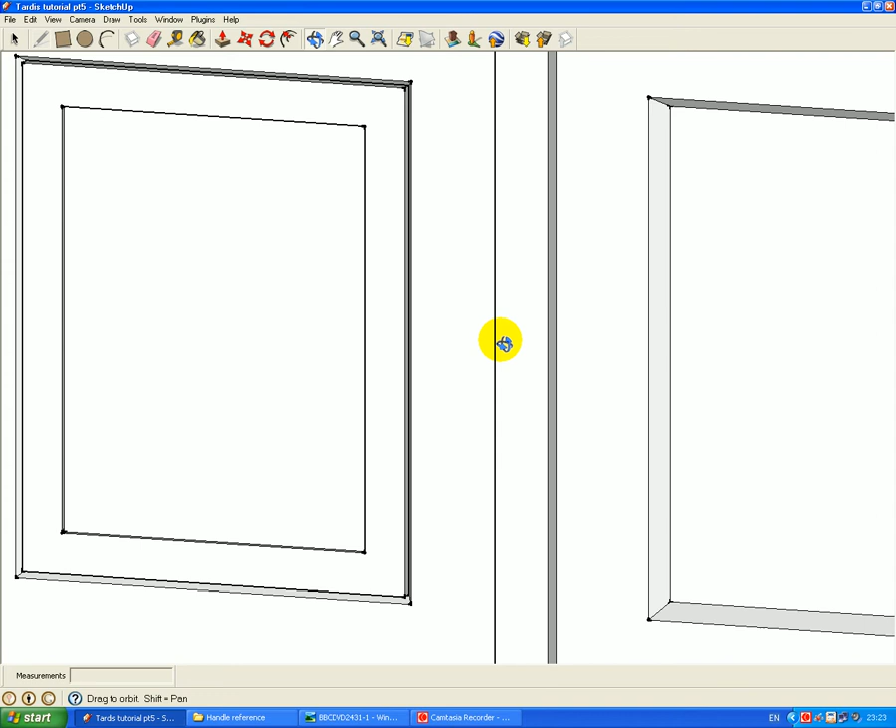I've started by loading the model from part 5 and zooming in on the centre part of the doors, and we're going to start by creating a couple of guides. First guide is from this edge here to the centre of this panel, which is 35 millimeters. Another guide from this top edge down the same face to the centre line of the panel, which is going to be 190.

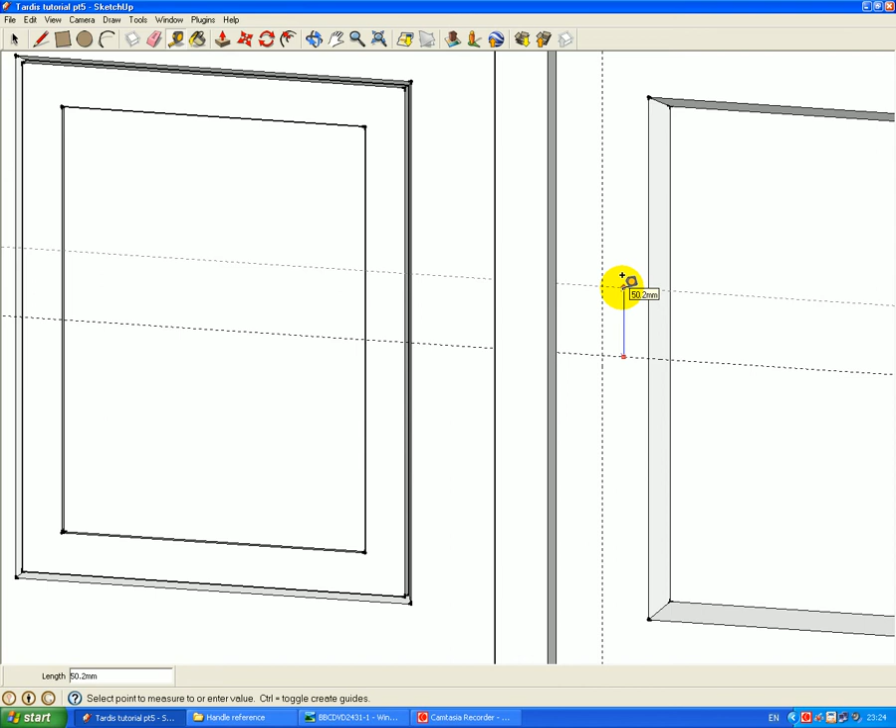We then need to create another guide up from this centre line, and that's going to be 82.5 millimeters. We'll also need a centre line on this panel, which is going to be at 15.

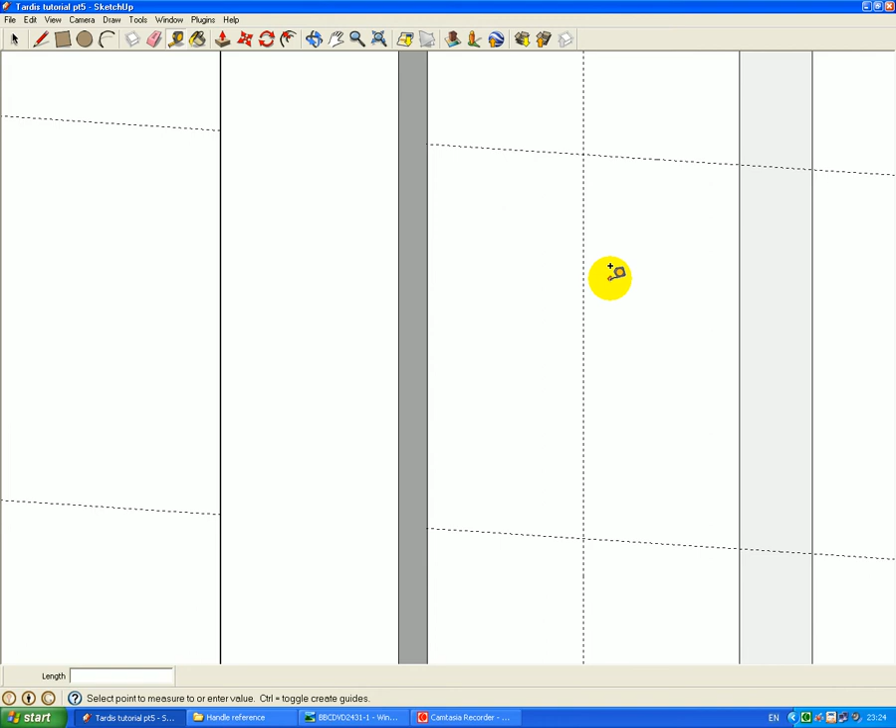We'll zoom in on this main work area here, where we're going to start to make the handle. First of all, we're going to start with the circle tool, and on the intersection of these two guides we're going to draw a circle that is 7.5 radius.

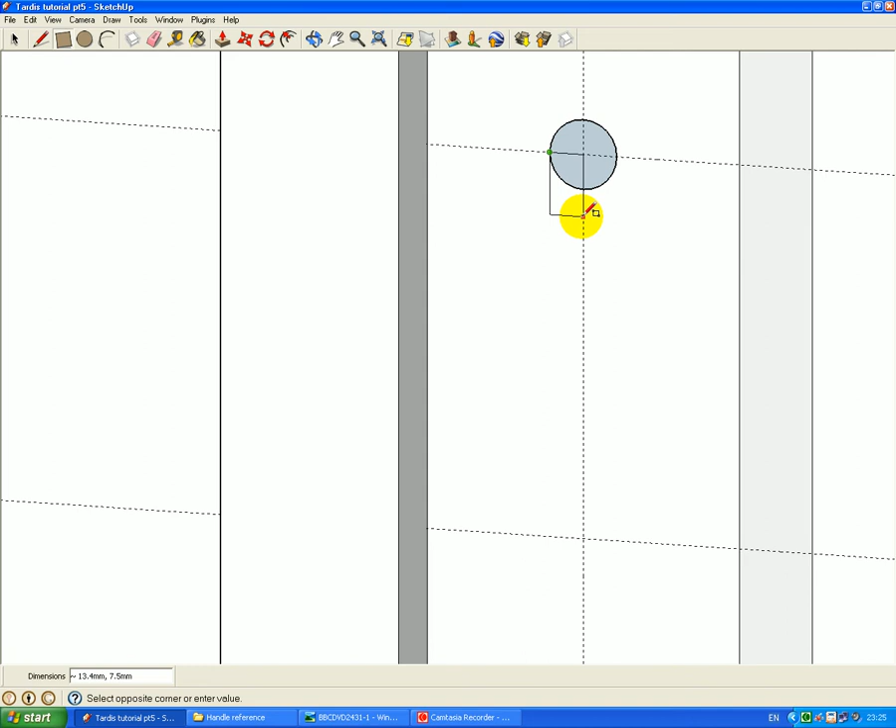We are then going to create a rectangle from this edge on the centre line, and it's going to be 32.5 by 15. We need to remove some unwanted lines from this, this circle here and this line here. Don't worry about that guide being deleted, we probably aren't going to need it again.

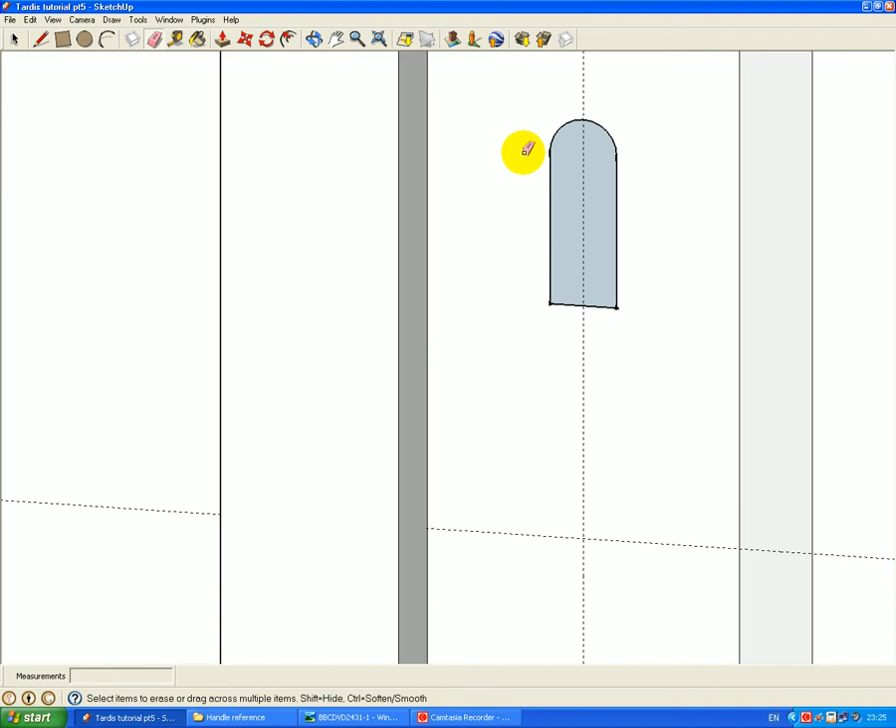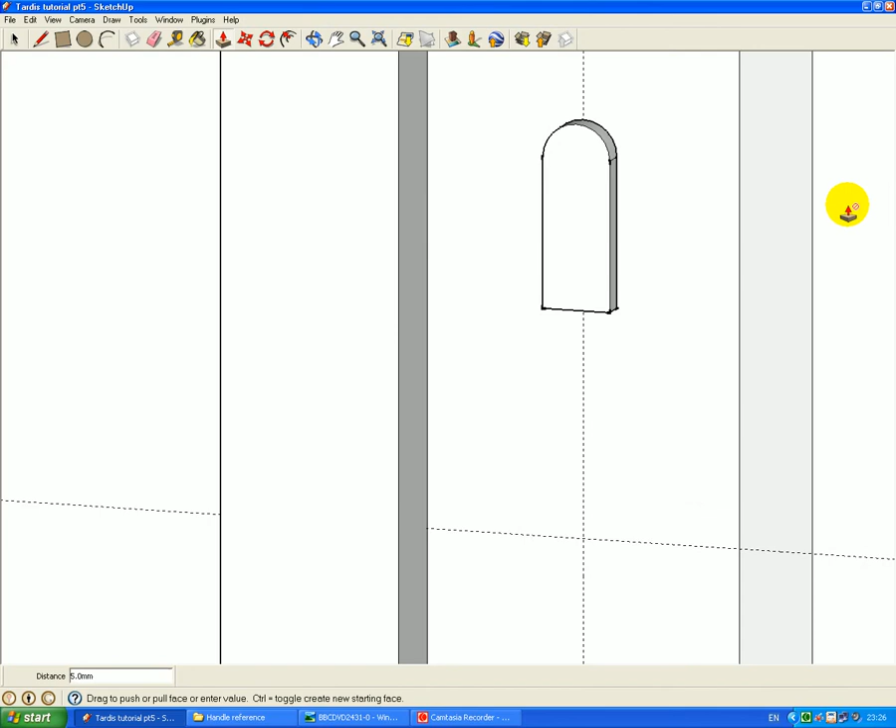Okay, we're going to zoom in a bit closer now. We're going to make our first screw hole. So again, the circle tool, but first of all, made a mistake there. We need to create a centerline guide on this surface, so from there, 7.5.

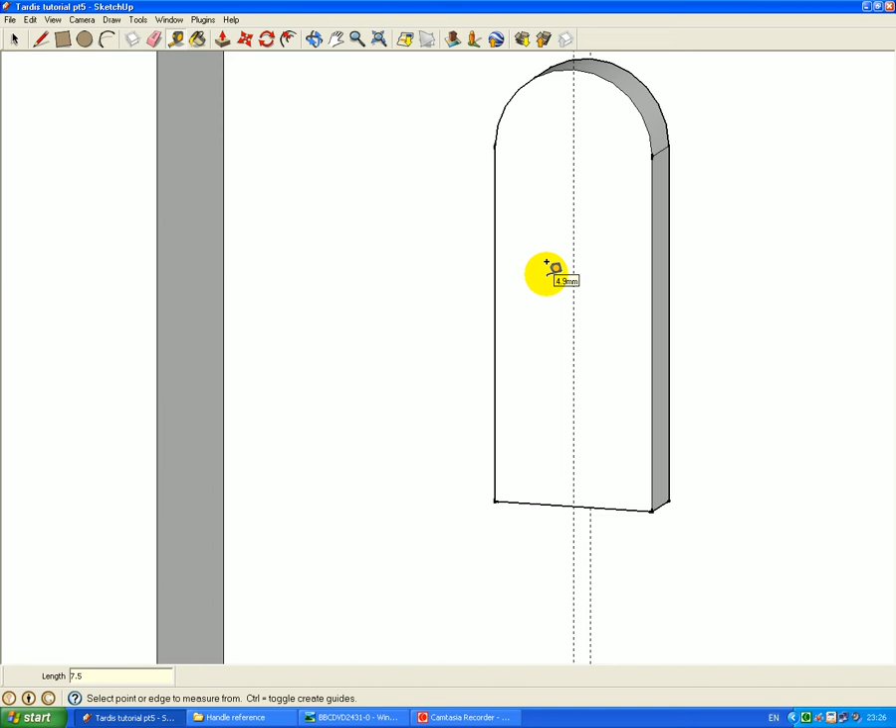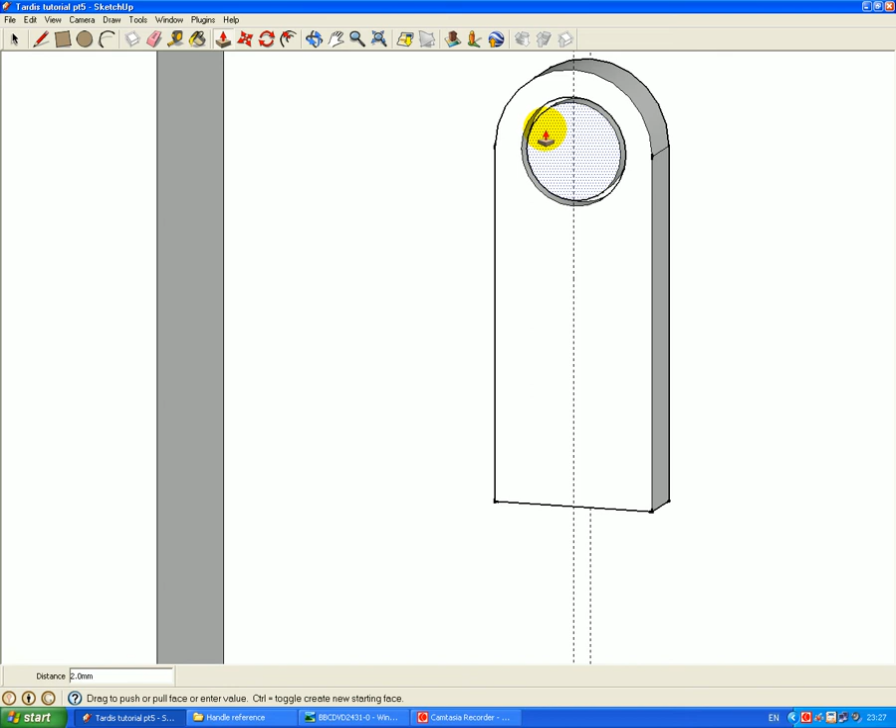Now we go back to the circle tool. Reference this edge here, and then go to the center line and produce a circle which is going to be 5 radius. Then use a push-pull tool to push that in by 2 millimeters, and then use the offset tool to offset this bottom circle by 0.5 millimeter, and then use the push-pull tool to pull that back out again by 2 millimeters. This is going to be our screw hole and screw head.

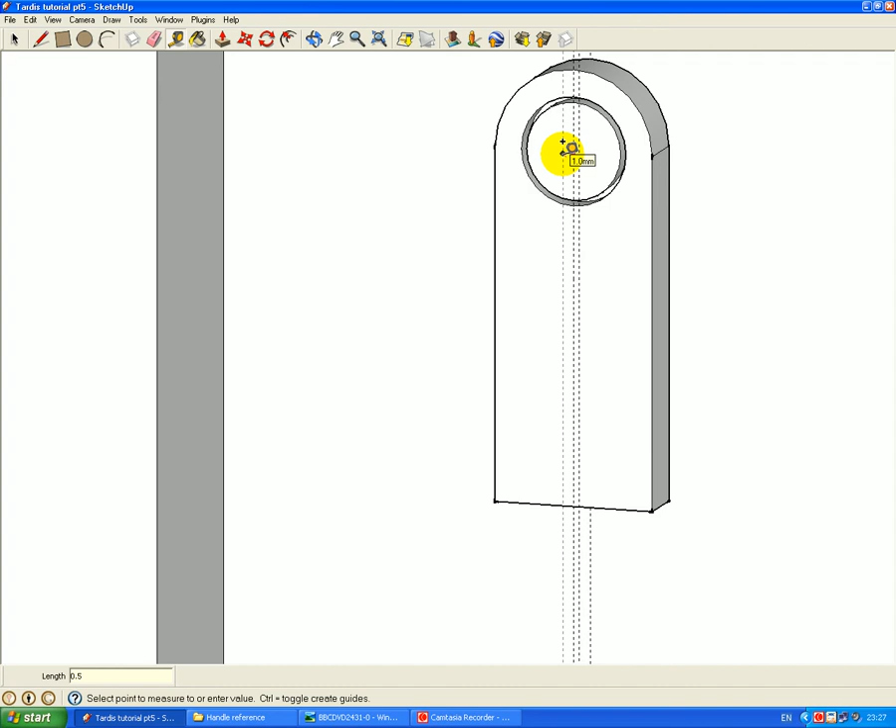We need to add another couple of guides. So from this centre line, we want a guide that's 0.5 millimeter over, and the same the other way, 0.5. If we zoom in on this circle, this screw head, and pan down a bit, we're going to use the line tool now to mark out the slot where the screwdriver would have tightened up the screws.

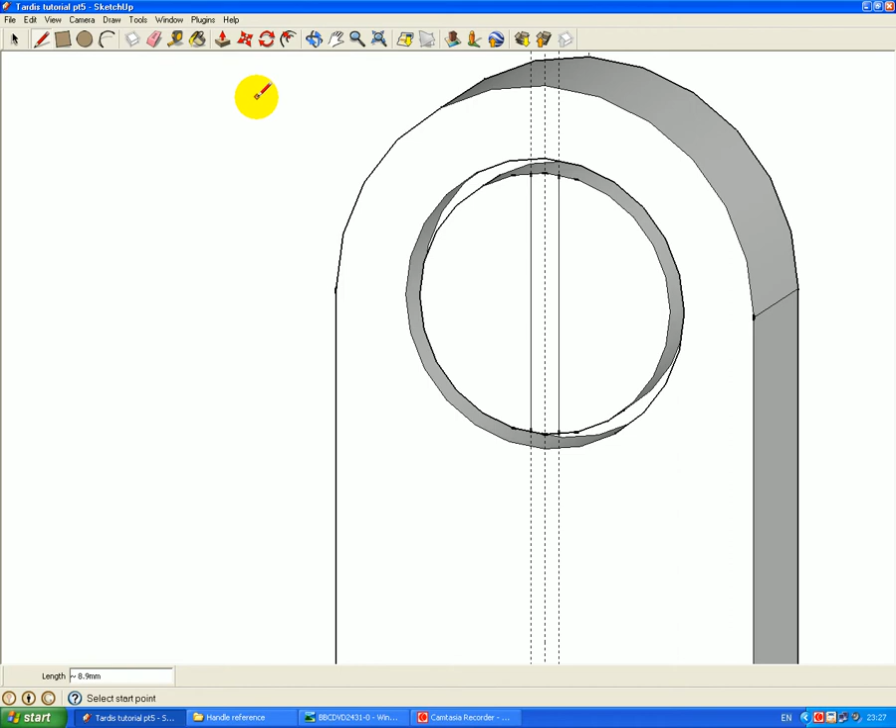So a line down there, and a line down there. Now if you use a push-pull tool, push that surface in by 1mm. And we now have a screw hole with a screw head.

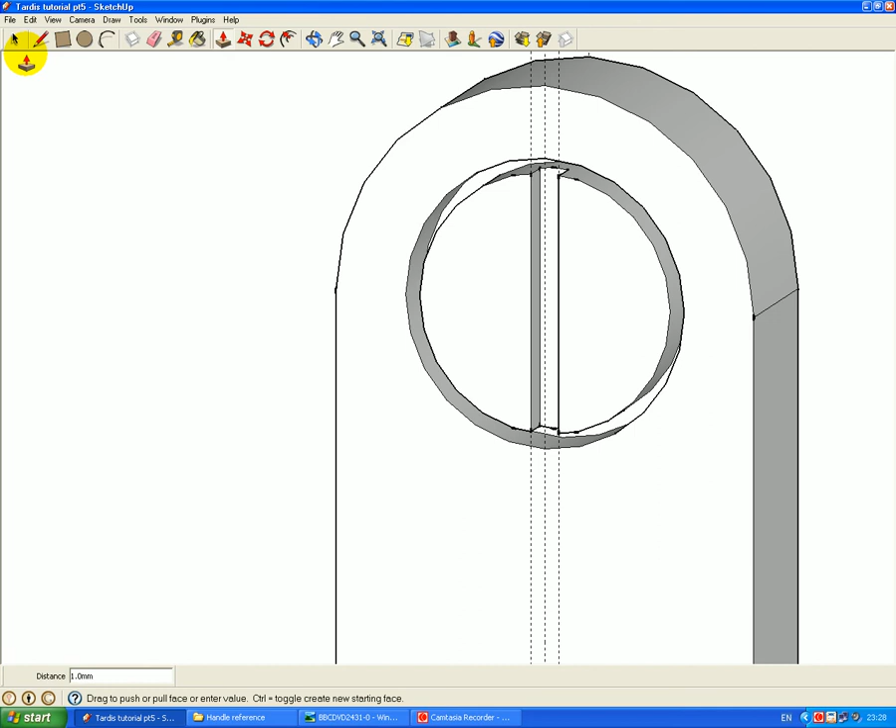To make it more natural looking, we're going to rotate the screw around to some sort of random angle. First of all we need to select it all, and we need to make sure that all the surfaces are selected. As you can see, this one isn't dotted, and neither is that one. Let's just check to make sure all the others are done.

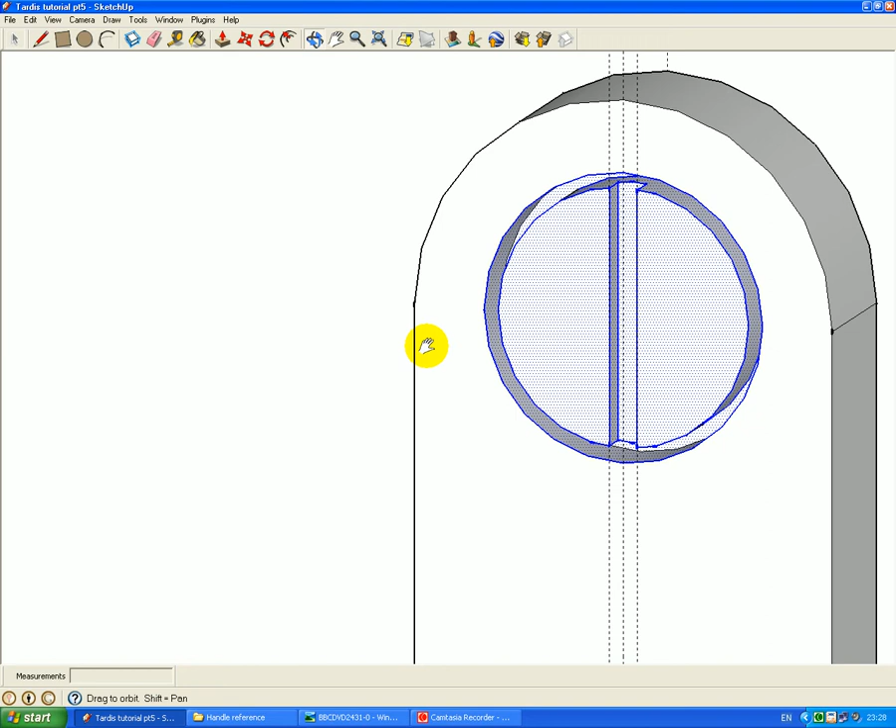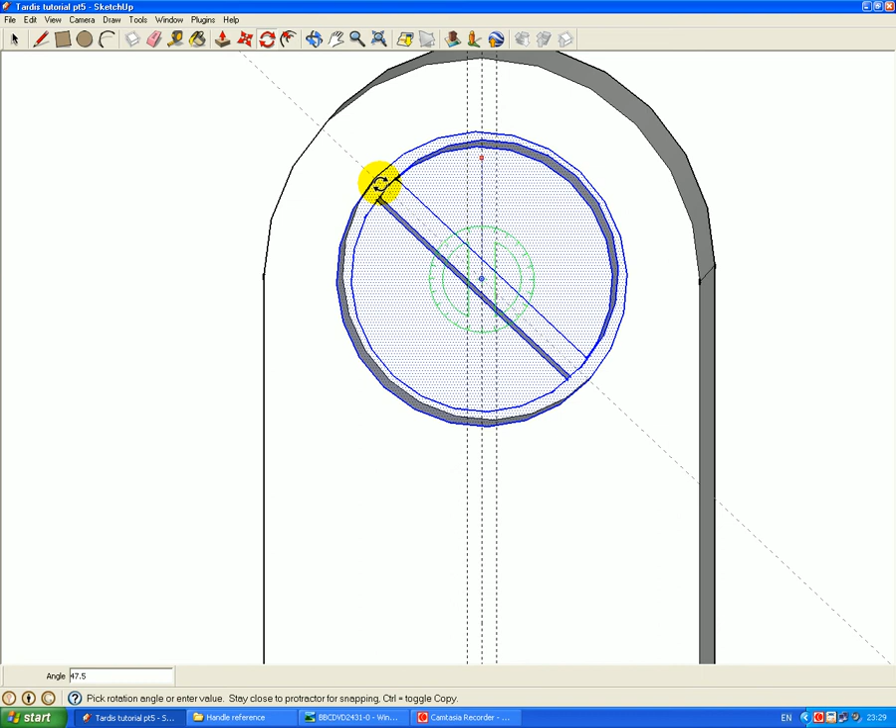So we'll tilt it around. There we go, yeah, they're all selected. Now with the rotation tool, again reference this edge here across to the middle, then up the centre line, and then just rotate it round at a random angle. There we go, that's the first screw done.

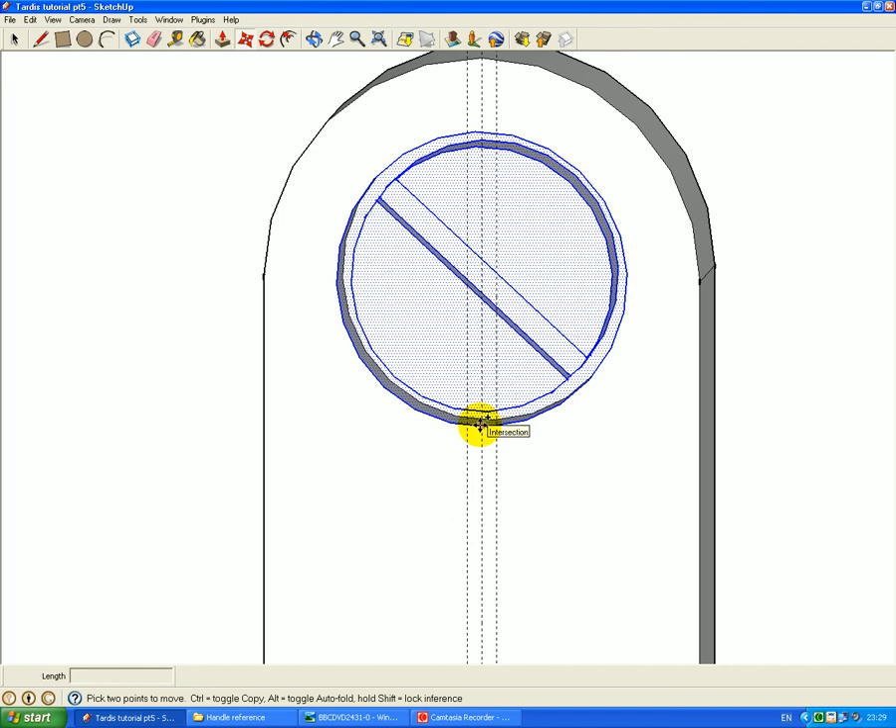We now need to make a copy of this and drag it down to make the second screw. So we go to the move tool, hold the control key down in the centre line here to start to drag it down and make a copy, and we want to move it down by 15. Zoom out, and there's our two screws.

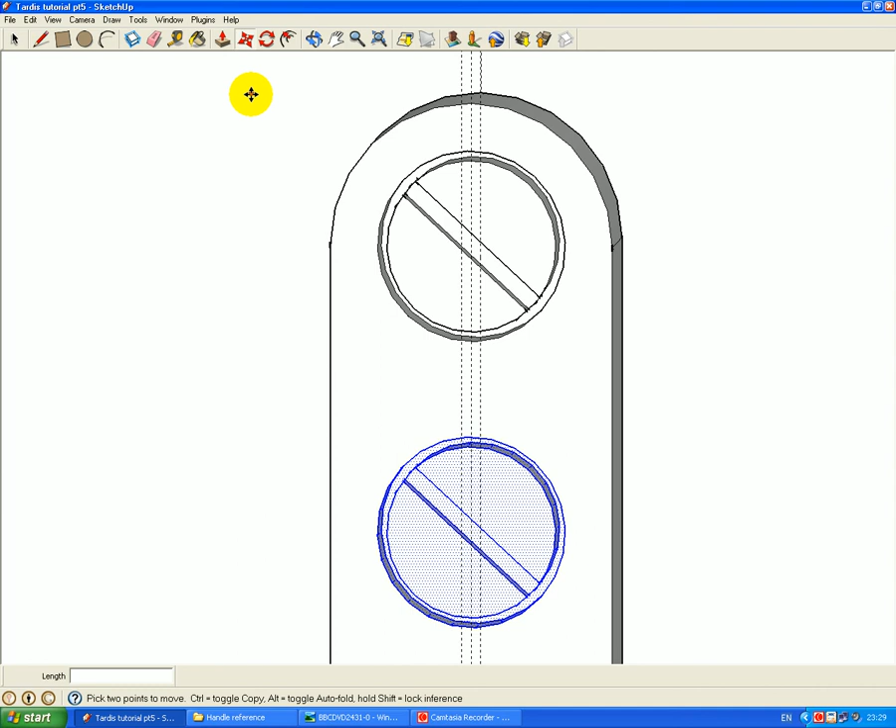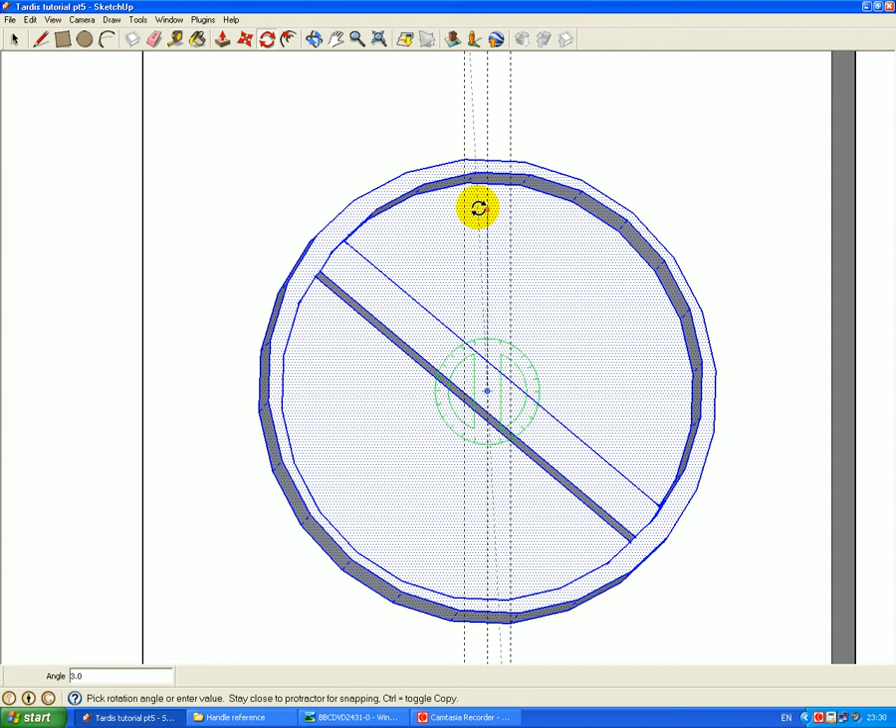I'm going to just rotate this one to a slightly different angle so it looks a bit more natural. Pan up and zoom in, and again we want the rotate tool, reference the edge here, and then go to the centre and up the centre line, and then just rotate it around to some other random angle. That's fine, there you go.

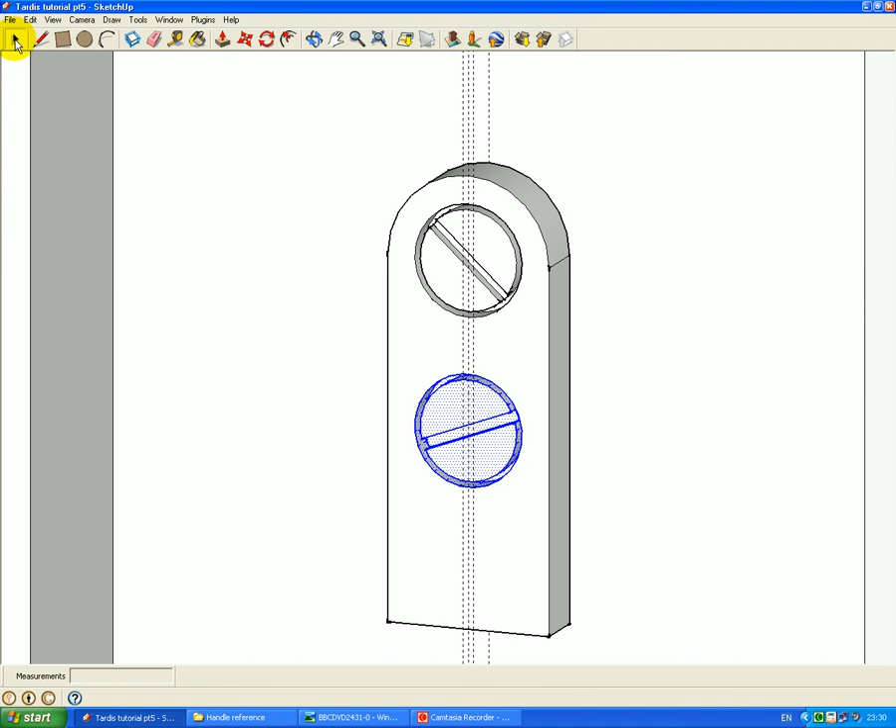Pan around, zoom out, and that's our first plate made with the screws in it. We're going to now make a copy of this, so we need to select it all.

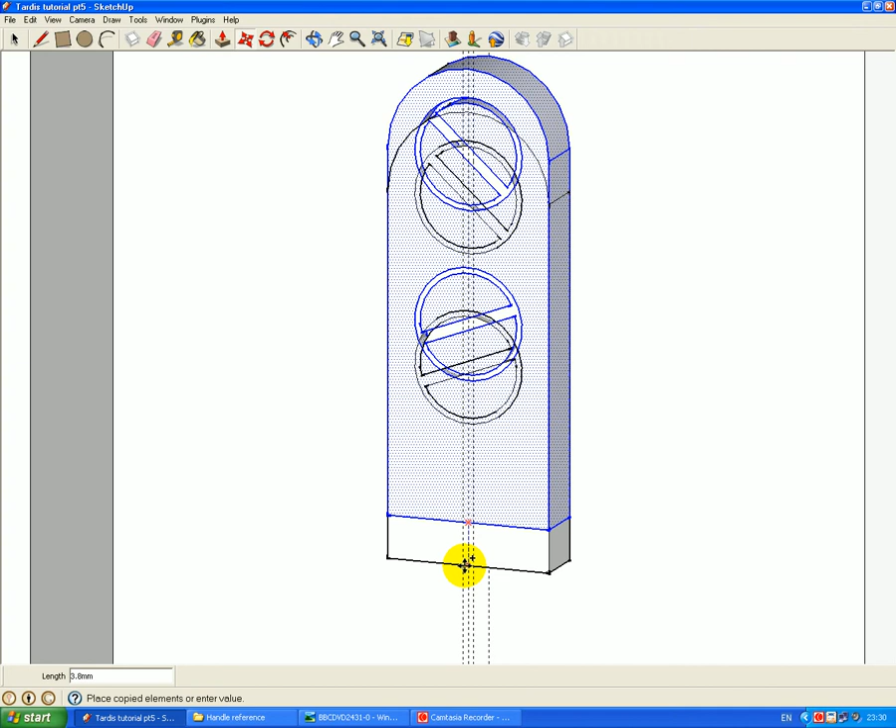Select the move tool. If we move it from this intersection between the centre line and the bottom edge, hold the control key down and drag, we'll make a copy of it, and we need to move it down by 100.

Let's pan up. There we go. Okay, that's in the right position, but it's facing the wrong way. We need to rotate it around by 180 degrees so it faces the opposite way round.

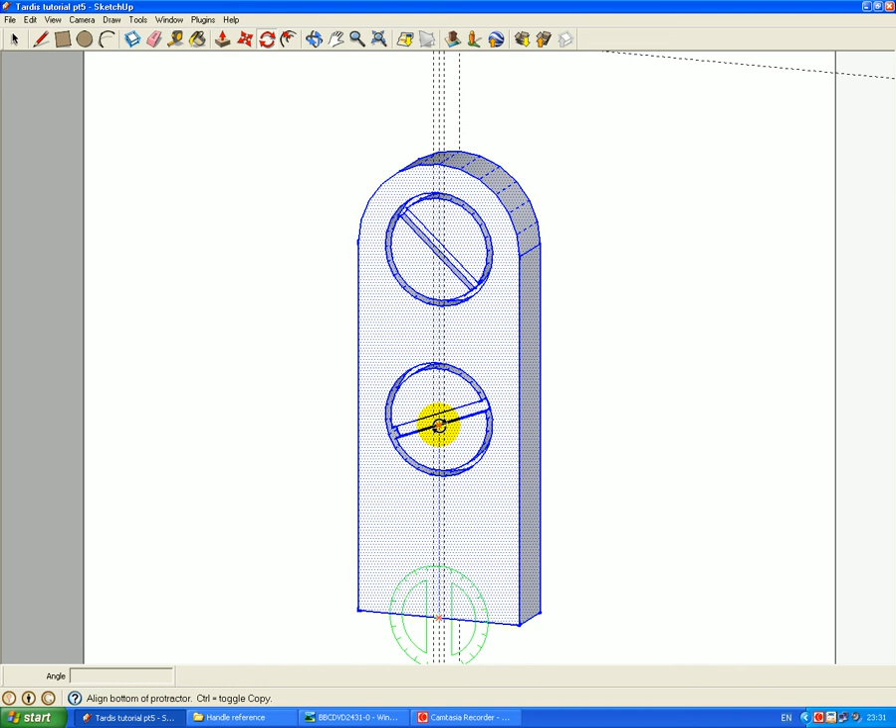So get the rotation tool, we'll align it with the intersection of the centre line and the bottom edge, go up the centre line, start to rotate it, and we want to rotate it round by 180 degrees. Okay, that's done. Zoom out.

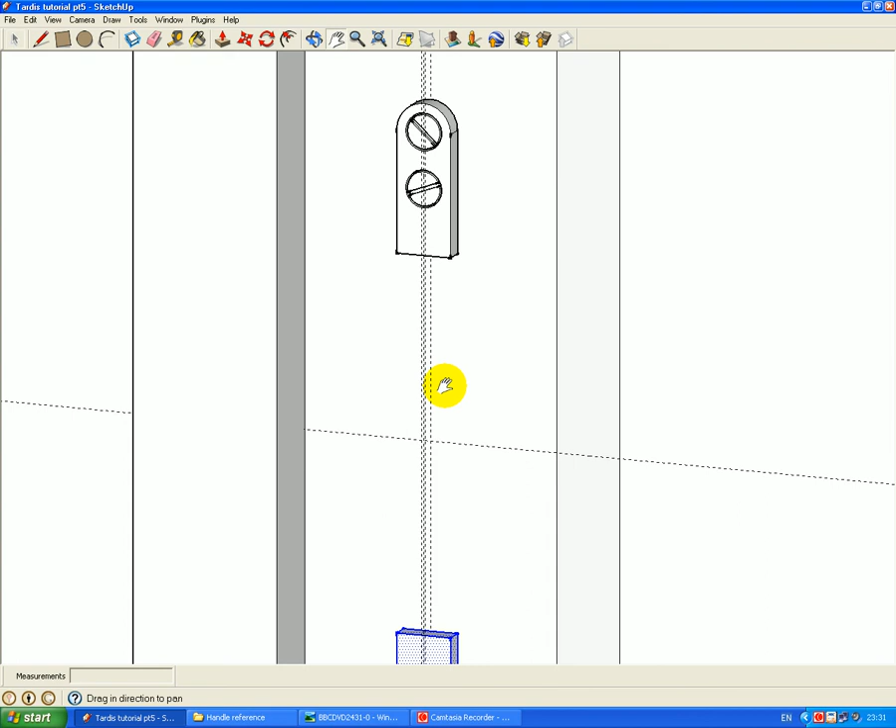And there we have our first two screw plates, which we're now going to form the handle on. So if we zoom in on the top plate.

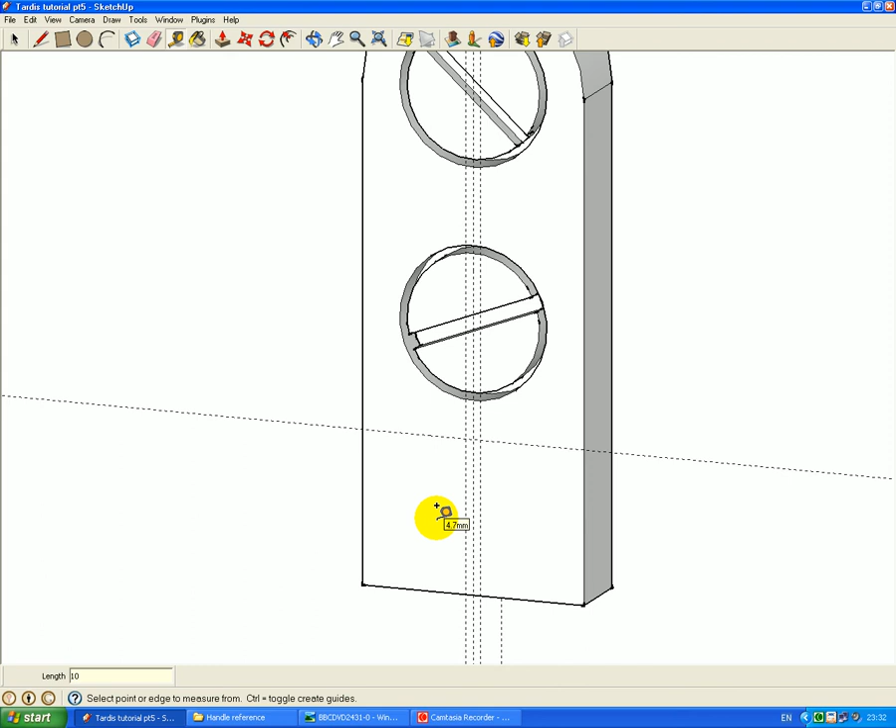We're going to make the cross section of the handle. First of all we're going to add another guide from this bottom edge, and that wants to be 10 from the bottom edge. Now we need to go to the arc tool and start on this corner here and this corner here, and then we'll produce a semicircle, so that will be 7.5.

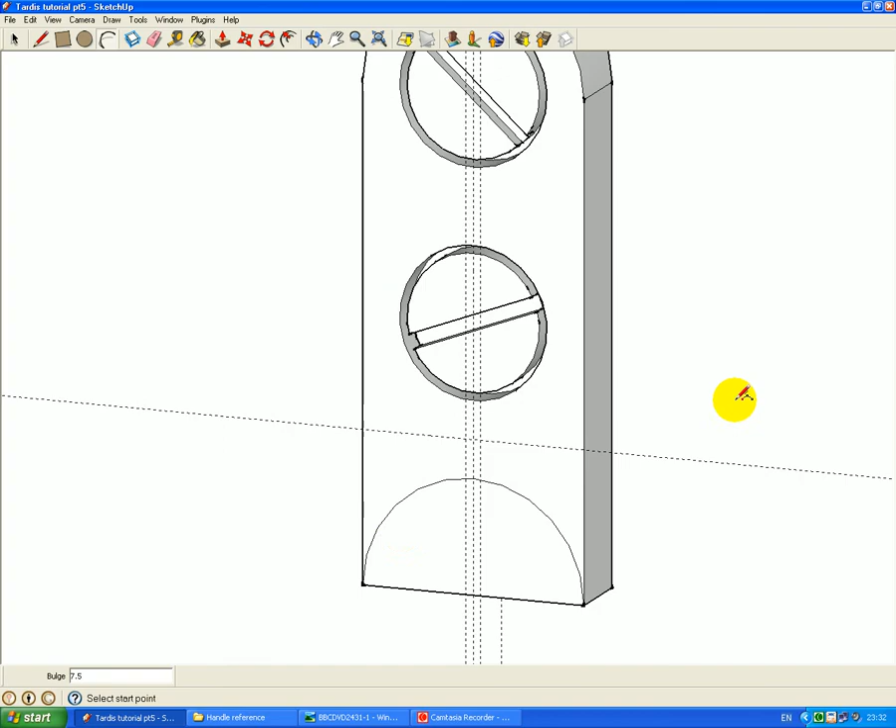If you look at the handle in the photo, it isn't sort of semicircular, it's more half elliptical, half an oval shape. So we're going to scale this handle, this semicircle, to make it into a sort of an oval type shape.

First of all we select it, then go to the scale tool, and then scale it from this edge upwards until it snaps to the 10mm line. That is our cross section of our handle.

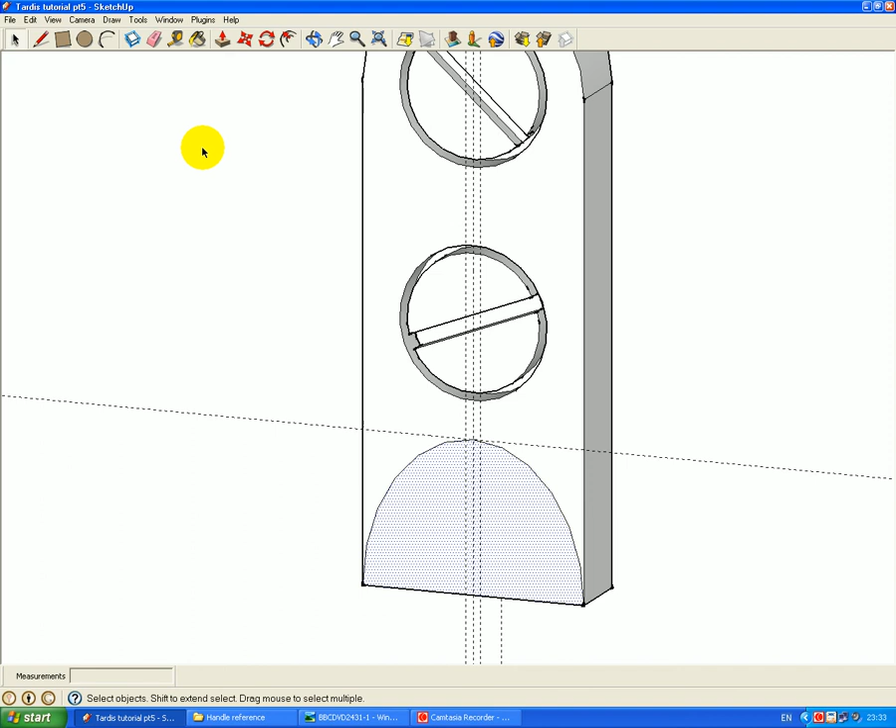We now need to make a guide for the handle to follow. First of all, we need to tilt it around a little bit more for this, and start off with the pen tool, and from this intersection here on the bottom edge in the center line, we need to draw a line on the green axis 15mm long.

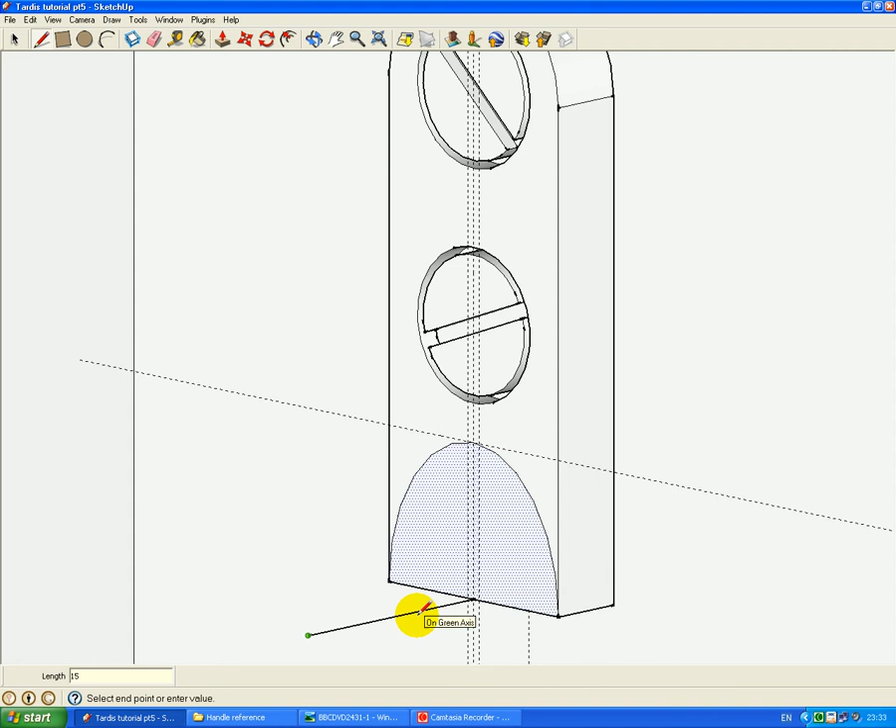We now need to create an arc on the end of this line, so go to our arc tool, let's go to the end of the line and start to create the arc along the blue axis, and that wants to be 40 diameter.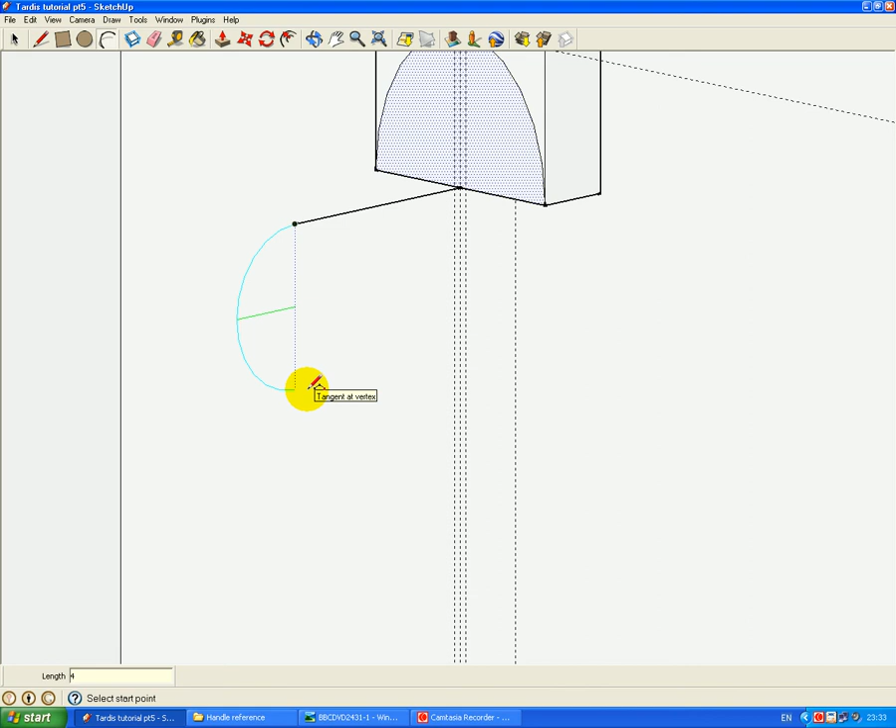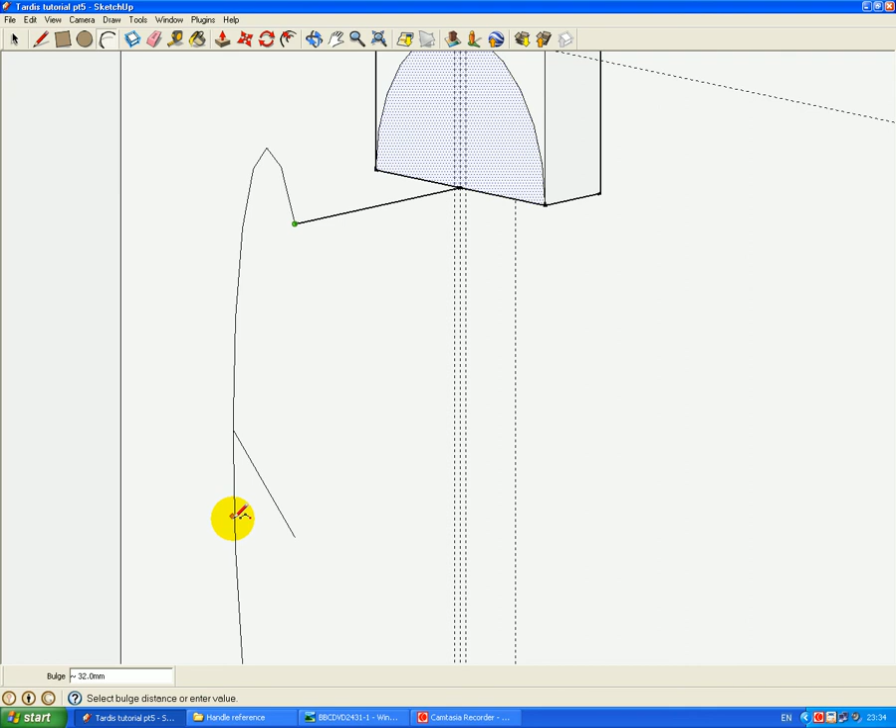And then along the green axis, this is a little bit tricky because it's hard to get it to go in the green direction. There we go. Let's get it to go in the green direction, and that wants to be 20.

So if we zoom out, that's our first arc, and we need to do the same on the lower handle plate.

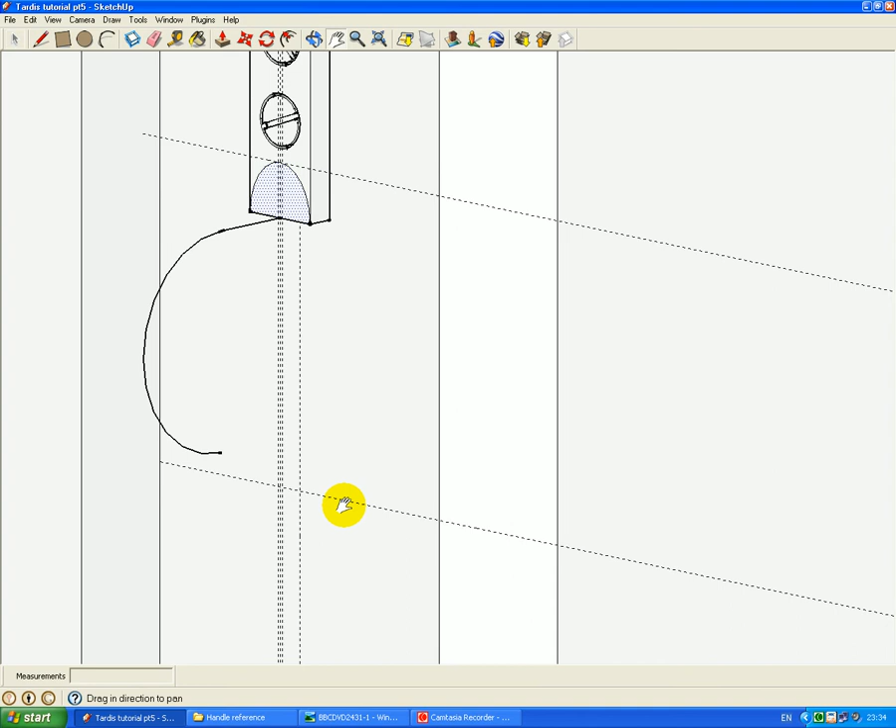Pan up and do the same on the lower handle plate. So we'll zoom in, pencil tool first, and go on the green axis, 15 long.

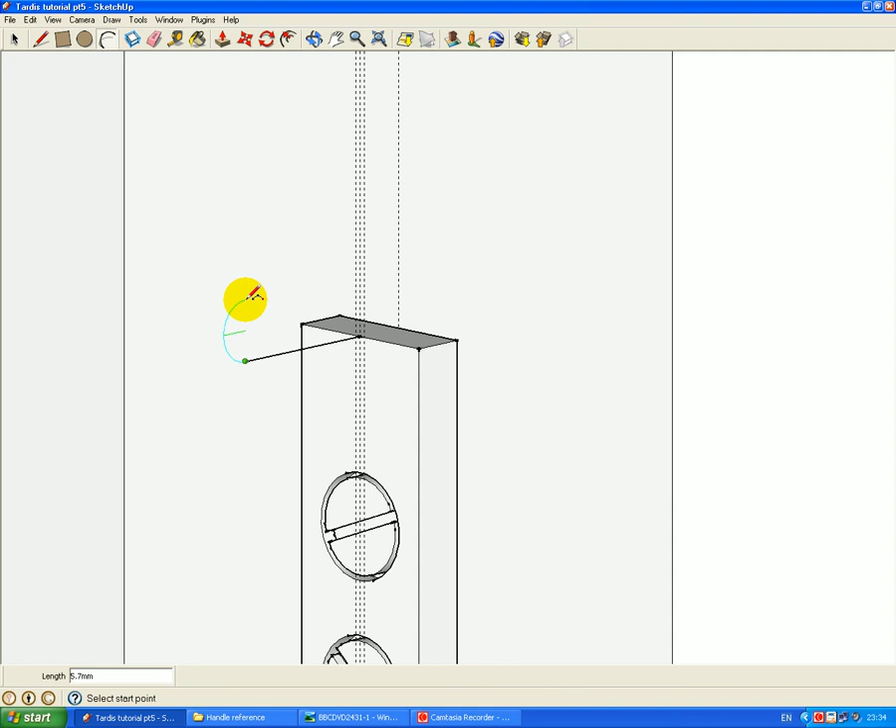Now we need to use the arc tool from the end of this line, and on the blue axis, and that must be 40, and on the green axis 20.

If we zoom out, pan down a little bit, and that's the shape we have so far. Make sure they're lined up.

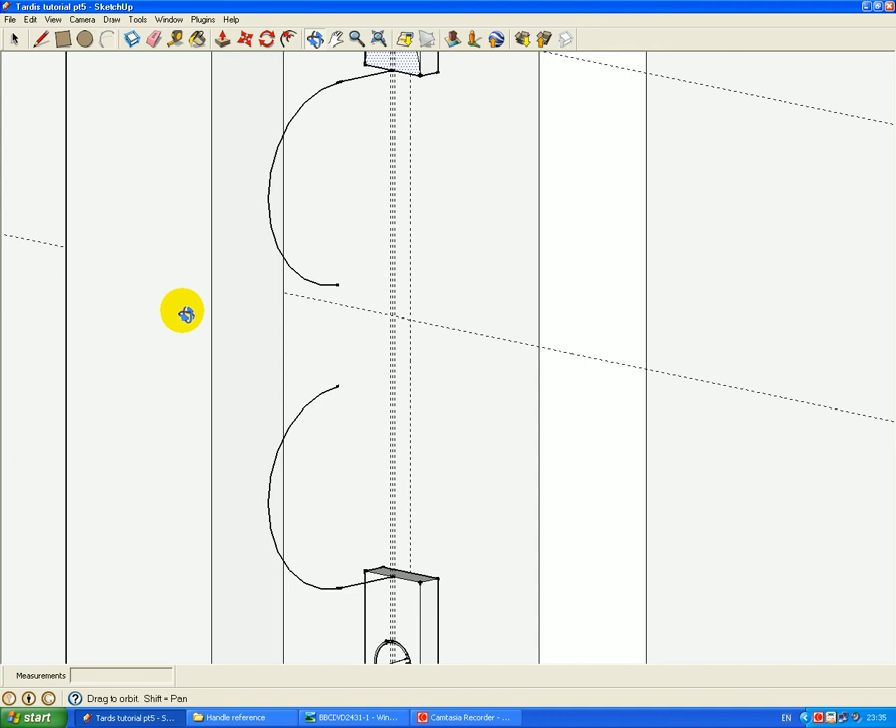Yes, they are. Okay. Now we need to use the pencil tool to create a line from the apex of this curve to the apex of this curve here, and we need to remove the lines that we don't want.

So go to the erase tool and delete this arc and this arc, and that's the shape we want the handle cross section to follow.

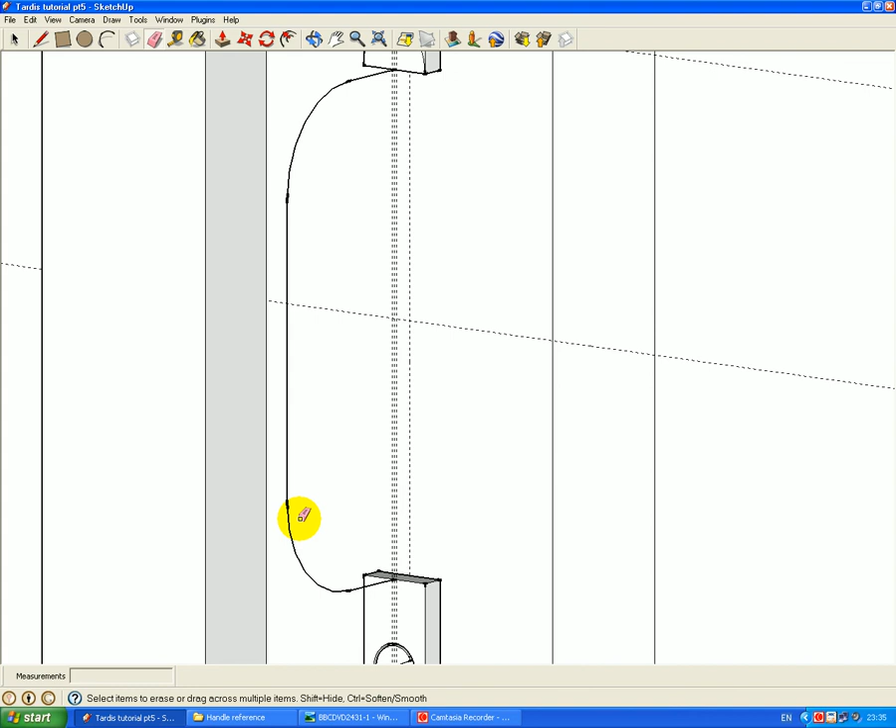So start by selecting the lines. Make sure you select only the lines and not anything else. So hold the shift key down, select all the lines that follow along the path.

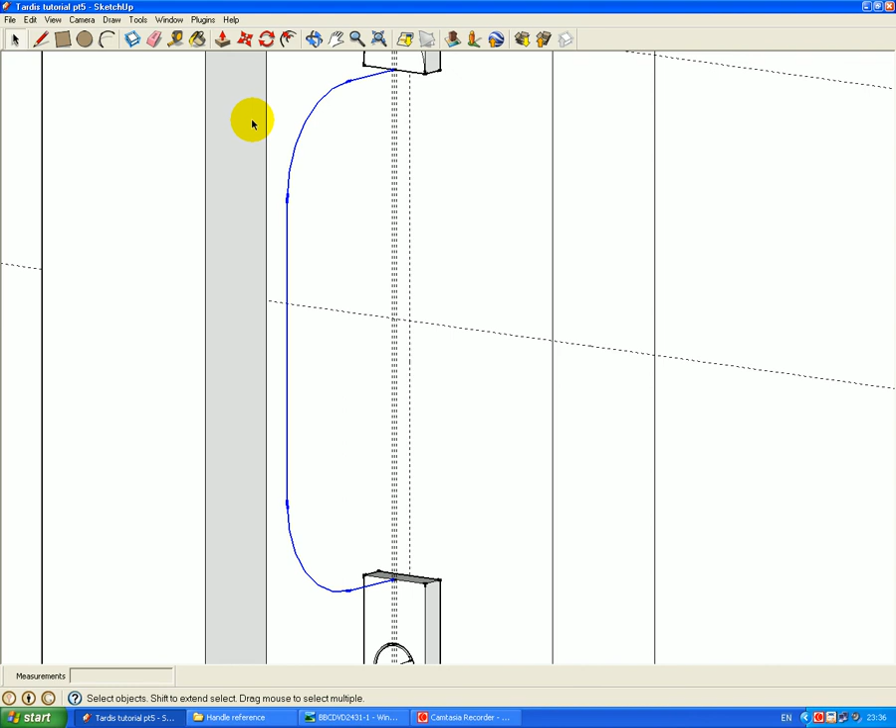And then we need to go to the follow me tool, select the profile of the handle, and there we have our first handle made.

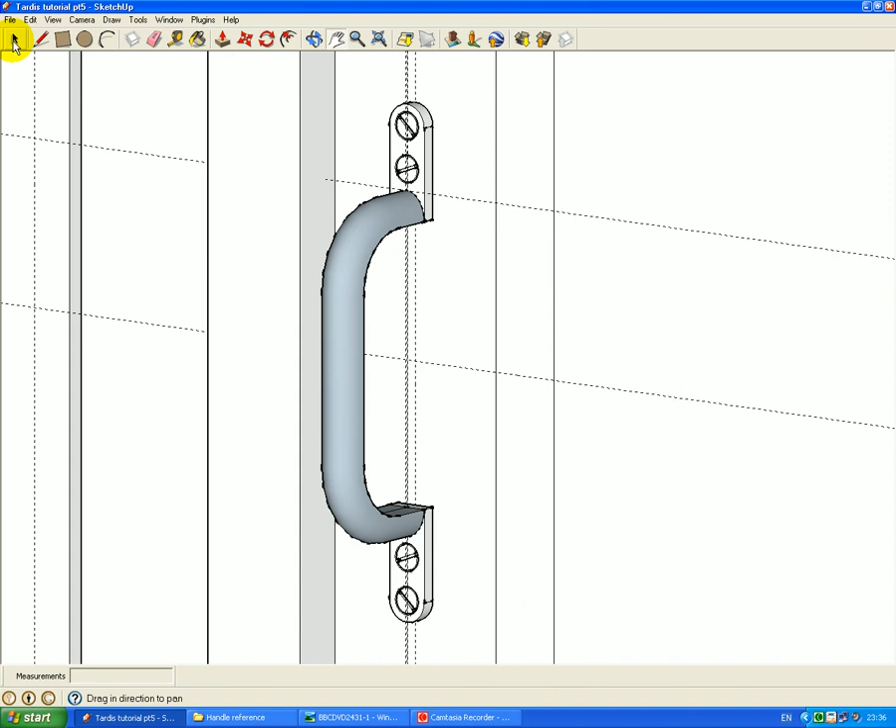Okay, we need to group this handle now so it becomes one object. So select all of it, and then edit group. That's our first handle made.

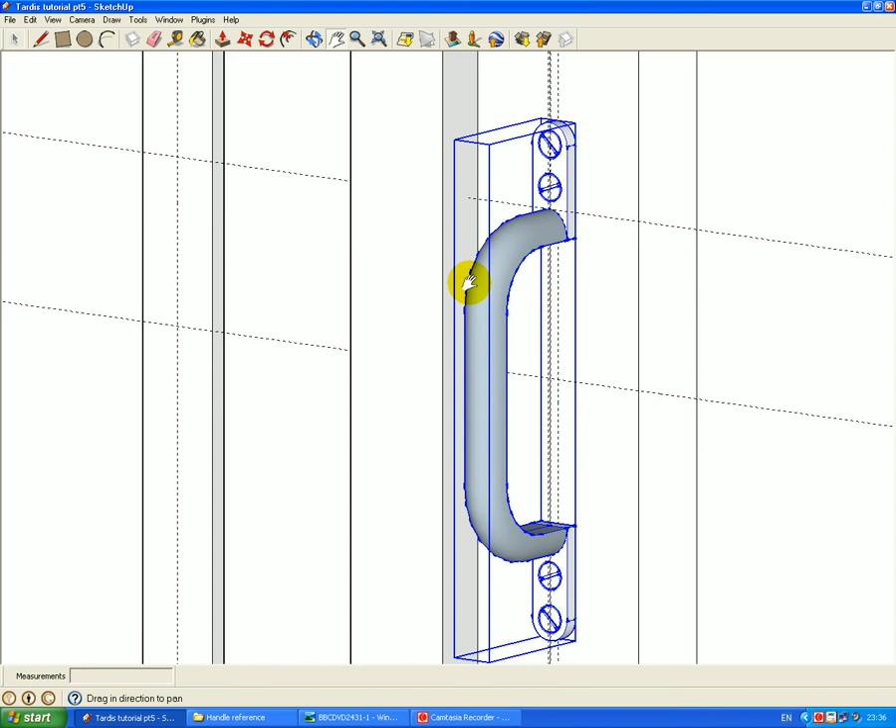We now need to make a copy of this handle and move it over to the telephone door. So again, we select the move tool, hold the control key down, line up on this center line that's on the door panel and the bottom edge of the handle, and start to move it and make sure it's moving.

Along the red axis, and it should snap to the center line, and then let go.

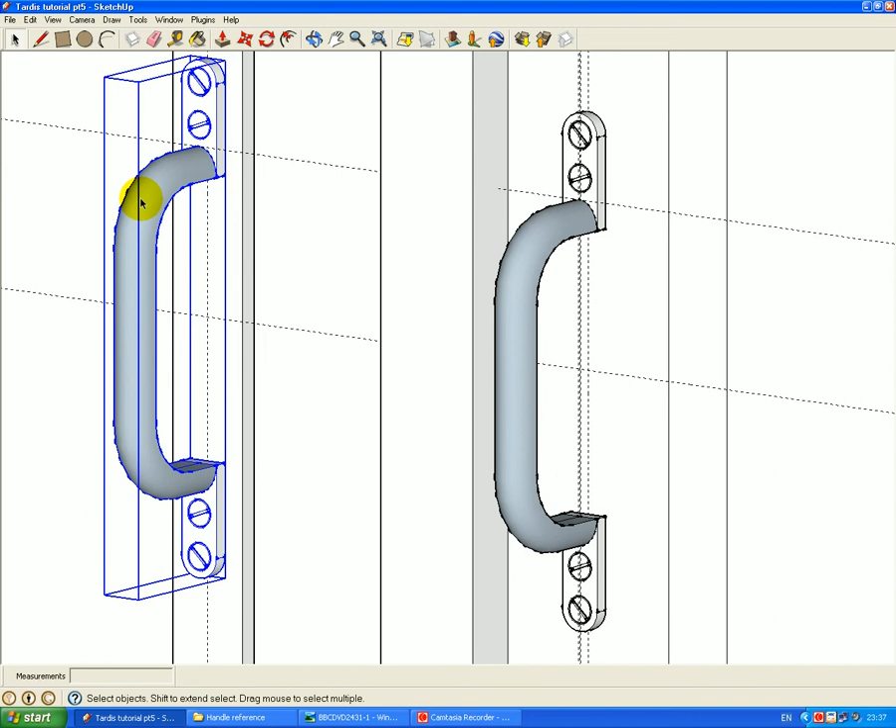Okay, now if I zoom out, deselect and delete all guides, and there we have our Tardis handle, one on the door and one on the telephone door.